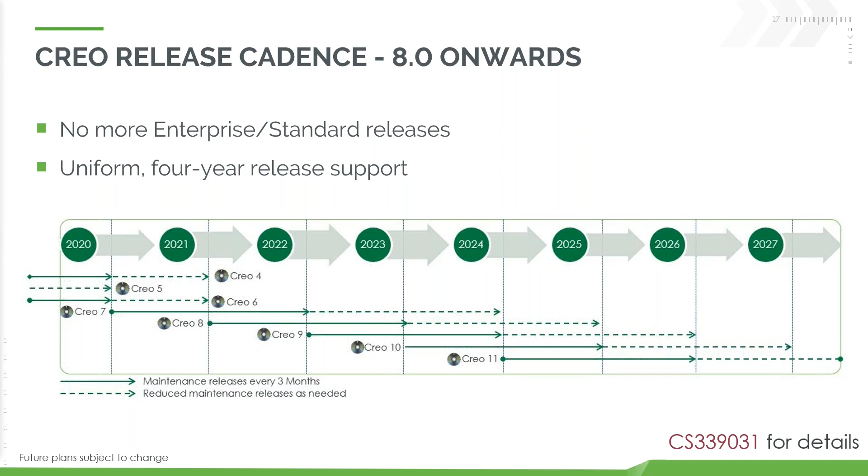So let's talk about some of where we got to. So Creo 7, Creo 8, some of those recent releases and what's been happening with those. So with every release of Creo, there's always these high-level themes. One of the core ones being just the general productivity enhancements, as well as some other topics you can see here. So with Creo 7, when that got launched, there were a few things there around generative, Ansys-powered simulation, multi-body, additive and subtractive.

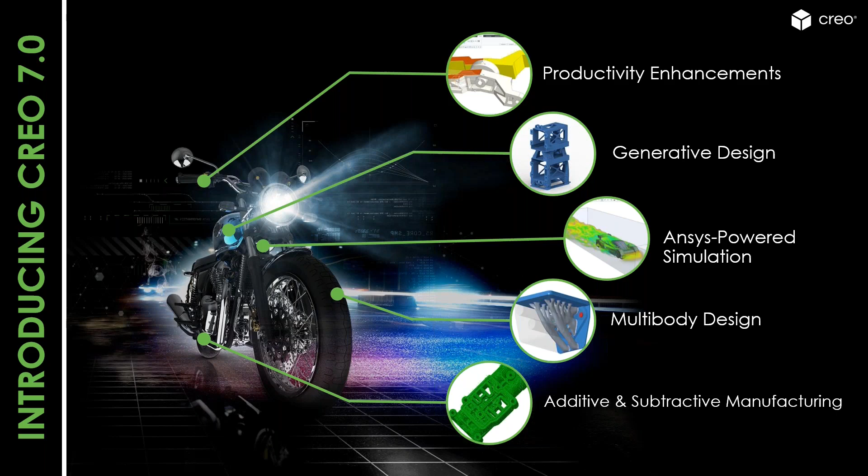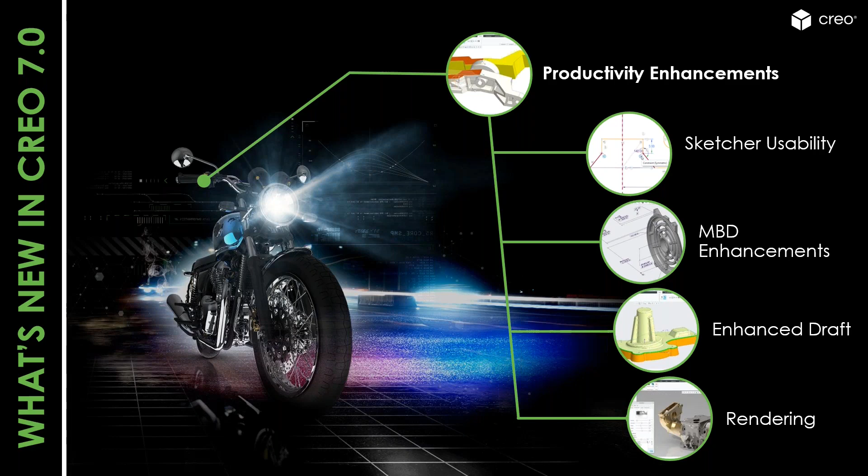So to talk about them in terms of the productivity enhancements, all the usual things, right? There's hundreds of these in every release of Creo. I'm going to get deep into what's there in Creo 9 later on today. But general things around usability, sketching, MBD. There are some very nice new tools in Draft. I had some customers, I remember, who once they saw that, went back to the office and installed Creo 7 that afternoon because they wanted to start using some of that stuff. So tons of general enhancements to make life easier and more efficient.

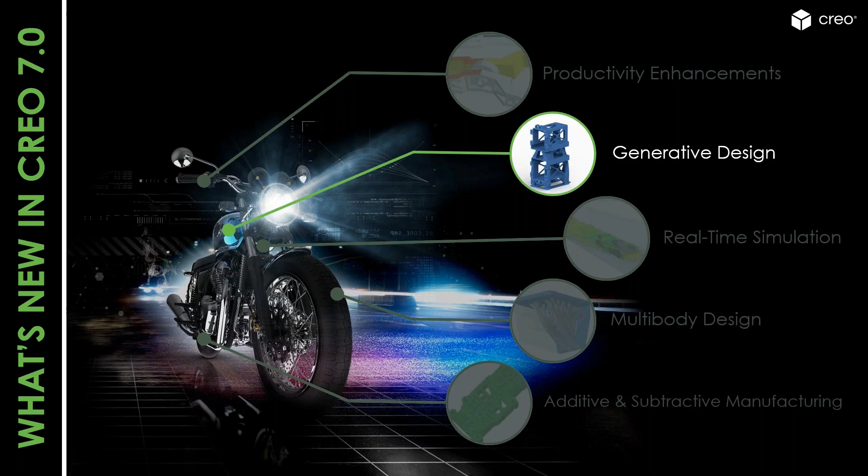But some other bits of technology around the Creo releases. So generative design. For those who aren't familiar with it, generative design is basically the idea of letting the computer come up with a design. So the idea is that you give it some conditions, so some geometry.

So you might say these are bits of geometry that must be fixed. You can see down here, my little screenshot here. So these blue bits, I must have them because I've got an interface there. This box around here is the area where you can do whatever you like. I'll give you some materials, I might give you some manufacturing processes, some loads and constraints and other things, and then go off and solve that for me.

Okay, and so you feed it to the computer, it grinds away and comes up with some weird and wonderful shape that you'd never come up with yourself in a million years, right? To minimize weight, get a better product. So that's becoming more and more common.

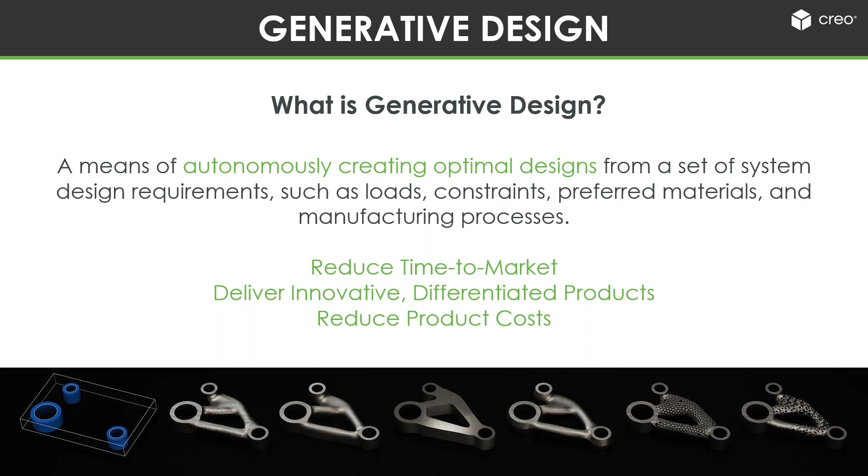And so I guess in Creo 5 PTC actually introduced some generative technology. It was through a third party. Actually, it's a solution that Leap sells, one of their products. So PTC partnered with those guys. But in the interim period, they acquired some technology, a company called Frustum. So in Creo 7, that Frustum engine was launched inside Creo.

Okay, so there are two flavors of that. Initially, when it first launched, there was the Generative Topology Optimization extension. Try saying that 5 times really quick. So GTO. So this was basically to run on your desktop to feed it all of those things I just talked about. Okay, so give it some starting geometry, preserve geometry, manufacturing conditions.

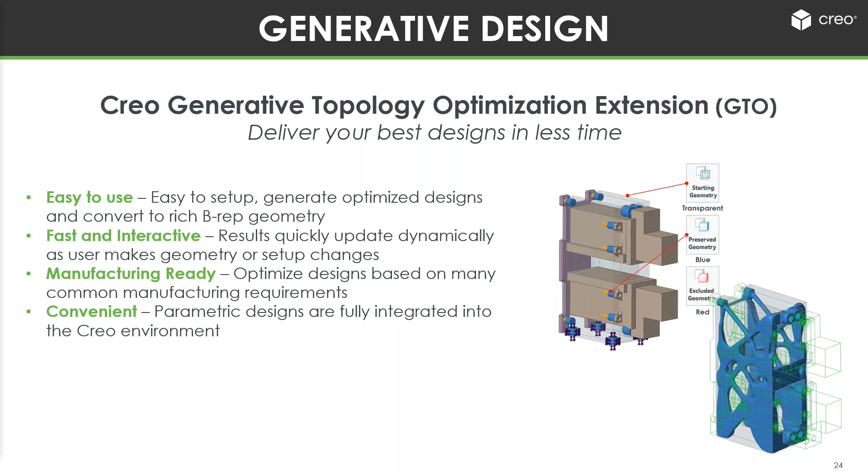The beauty of this, it was completely embedded inside Creo, right? You're not farming out to some other system. It runs all inside the native environment. The other big thing is it also automatically builds for you a manufacturable surface. So a lot of things where you take that externally, you end up with a faceted model that you then have to somehow bring back into your CAD tool and make into smooth NURBS surfaces, manufacturable surfaces, whereas Creo does that itself.

Okay, so this launched with Creo 7 at first release, and then a little bit down the track with a couple of maintenance builds, PTC launched the cloud-based Creo Generative Design extension, so GDX. So the idea of this is, when you're looking at a design problem like this, you might have lots and lots of options that you want to look at, right? So you might be looking at multiple materials, multiple manufacturing constraints. Maybe you're looking at, well, what if I 3D print this versus cast it or machine it, whatever else it might be. So they have different constraints to them.

Different loading conditions as well, but you've got lots and lots of different options, and you want to look at those different combinations. Okay, so that's where the cloud comes in, because with cloud we've got lots of compute power. You can scale that up and feed it loads and loads of stuff rather than having to just send them one at a time, running them on our desktop.

So the idea of this is we can set up all of those different conditions inside Creo, upload that to the solvers on the cloud, which will then go away and solve all the possible combinations. And then we've got a bunch of tools to look at, analyze that, compare and contrast, select which one we think is the best, and then feed that back into our Creo model to give us some full B-rep geometry. Okay, so this is the cloud-based GDX.

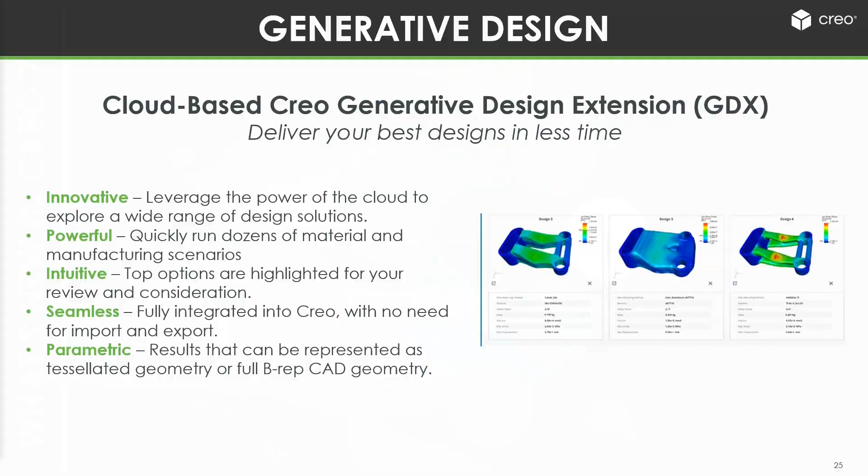So some other parts, ANSYS powered simulation. So again, back in some early versions of Creo, it was Creo 6, was when PTC started partnering with ANSYS to bring in some of the ANSYS technologies. So that was with Creo Simulation Live, which first came in there, which is based on Discovery Live. So this was real-time simulation. With Creo 7, PTC also started to bring in some of the other ANSYS technology as well.

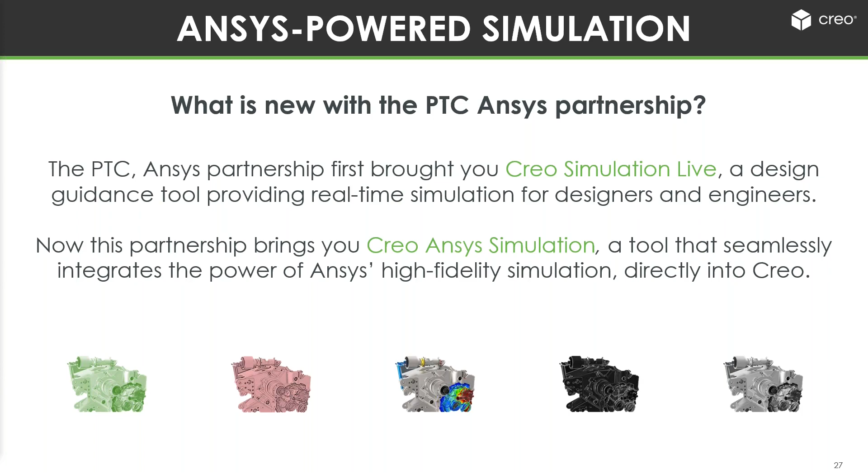Okay, so Creo Sim Live, as I mentioned, this was first introduced in early builds of Creo. So this was the Discovery Live. So this is basically a GPU-based solver. So that means it's hardware dependent. You need to have an NVIDIA graphics card in your computer that it utilizes to essentially solve almost instantaneously. Okay, so that was first introduced with structural, thermal, and modal simulations.

With the release of Creo 7, fluid flow capabilities came in as well from Discovery. So that could be internal or external flow. In a similar vein, you set up your model and let it grind away and start showing your results almost instantaneously.

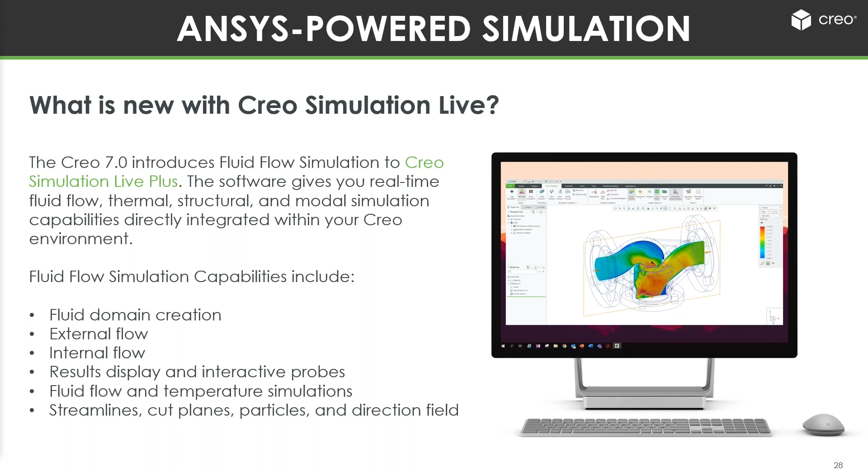Okay. So the other part was Creo ANSYS Simulation. So this is basically the ANSYS Workbench engine. So that's the meshing and solving tool. So again, that's being migrated into Creo. Creo 7 was the first release of that. You'll see in later slides how that's been evolving with releases. So this is basically ANSYS running embedded inside Creo and all of the capabilities that can bring.

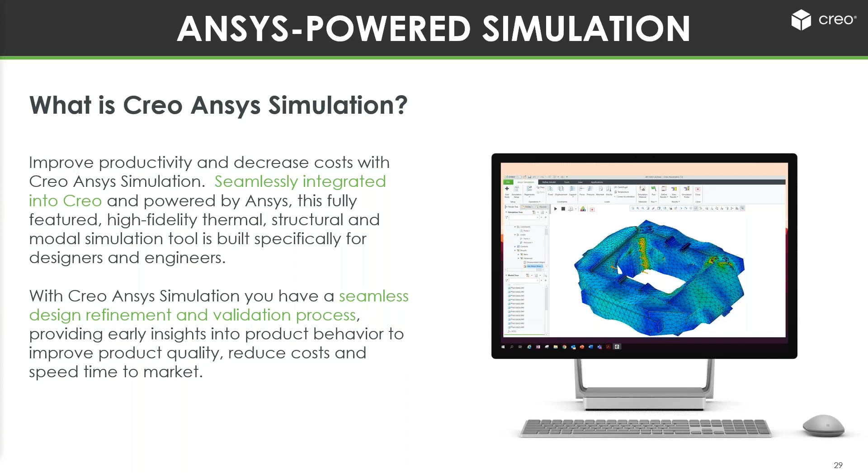Next one at a high level topic was multi-body design. Okay, and this was really the big one. So Creo 7 introduced multi-body design as a set of design tools. It lets you basically define different geometric volumes as individual bodies. You can assign different materials to them. As an example, you can use them for different scenarios.

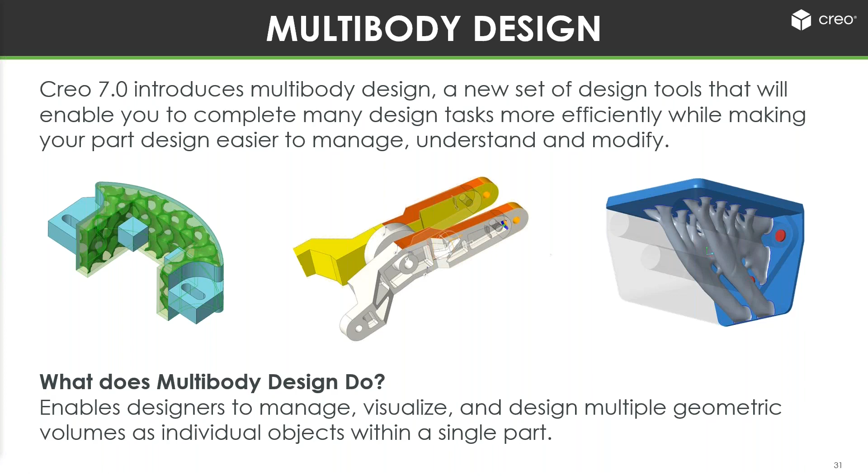So really, PTC is quite famous for not having multi-body in Creo. It was introduced really to enable these different workflows for some of these new technologies. So for example, additive manufacturing, the ability to define certain parts of the model to use lattices versus solids, or maybe different materials. In generative design, again, we have used different bodies for defining these different regions that we want to keep or exclude, or let the system muck around inside. So it's really basically giving you a different set of design tools to enable faster, easier, more flexible modeling.

So speed, there are certain tasks that can be easier modeled as solids. So multi-body gives you a way to do that. Probably one of the most common ones would be around clarity here. So, multi-material parts, the classic silicon injection molding, over molding, right? Where you've got one part with multiple materials inside that. So we can do that as multiple bodies. And just general flexibility. It could be around different pieces that might require different approaches. Simulation-driven design. So, in our example here, the important bit is the fluid domain. So we can model that up and create that as a body and use that to build our geometry.

So multi-body was first introduced in Creo 7. This was a very big change, right? Probably the biggest change since the introduction of Creo, because it was really changing the way that the engine could behave. Now, if you don't use multi-body, that's fine. You can keep using Creo as you've always used it, all the way back to Pro Engineer days. It still behaves in that same way, but bodies are now an option there as well.

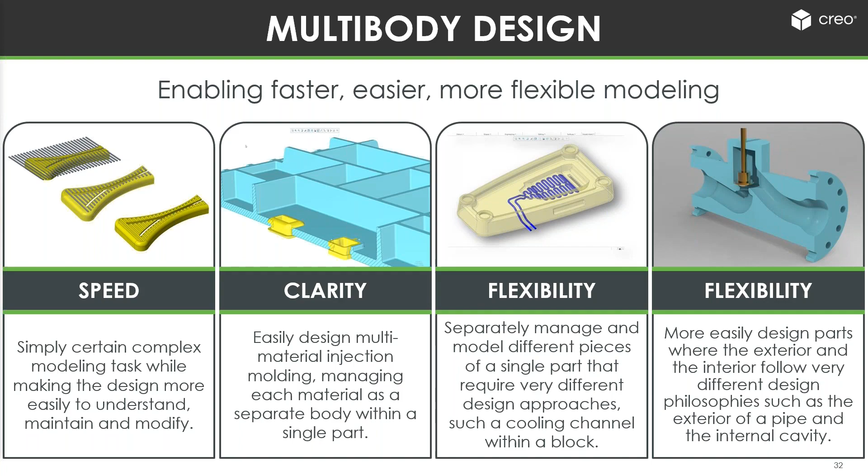And the last topic was really around additive and subtractive manufacturing. So again, back in Creo 3 was when PTC first introduced some of the additive tools inside Creo. So basically the ability to send your files directly to certain supported 3D printers. Creo 4 was, I guess, the big step there, where they introduced the lattice feature. So the ability to define these repeating structures inside your CAD model, rather than taking that outside to some external software.

Now that's fine if you're talking about prototype printing, but if you're getting into actual additive manufacturing, it's important to understand, well, if I make this as a lattice, what's that going to affect on the structural integrity of my model? So you define that lattice inside the CAD tool, perform your analysis, understand what's going on; that was very important. And that's really why PTC introduced the lattice feature back in Creo 4.

So in Creo 7, some more enhancements to that. Things around the ability to have user-defined lattices, so you can define your own part and use that as a lattice. We had a lot of queries from the universities who did a lot of research in this area, coming up with new optimal shapes. Some formula-driven lattices, like the gyroid and other shapes built off research coming out for self-supporting lattices. Stochastic lattices, these more organic shaped things that can follow geometry, often used in medical implants where you want tissue or bone to infuse with the implant.

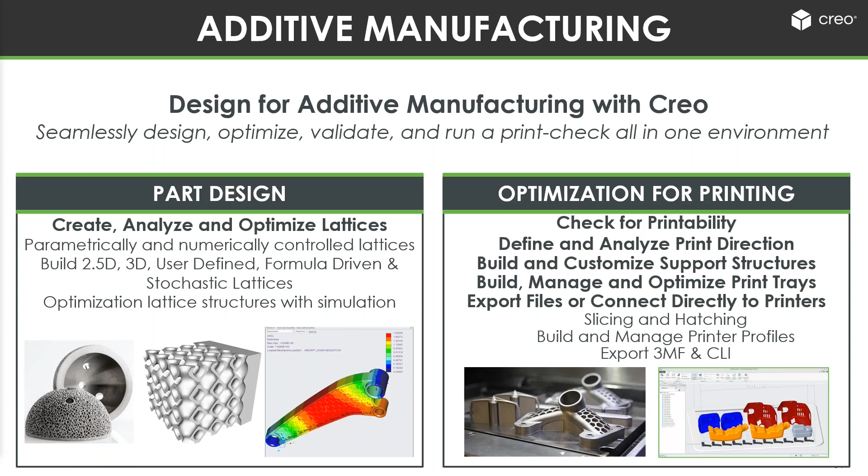And some tools around optimization as well inside simulation. And then also some options around printing. So lots of printability checks and analysis for print direction around support structures. Particularly important when you get into metal printing, where you want to minimize support structures because you usually have to post-machine that off. Also, added support for 3MF files, basically the new file format that's replaced the old STL format because it supports multi-material, multi-colors, and CLI files for metal printers for slicing. So that was some of what was there inside Creo 7.

And then we move on to Creo 8, which came out April of last year. So again, the high-level themes there: usability and productivity, the general one; model-based definition and detailing; generative design and simulation; additive subtractive manufacturing. So a lot of common themes there. PTC has been spending a lot of time and effort in bringing these emerging technologies embedded inside Creo. These technologies are obviously rapidly evolving, and with each release of Creo, we're seeing more and more of those capabilities coming in.

So on the general usability productivity side, again, a whole ton of things. Some of the high level ones to discuss, the nice change to the dashboard layout. So a bit more text inside the dashboard. Probably gone a little bit too far down the icon path, but adding a bit more text in, particularly good for new users.

So a little bit more explanation of what you're looking at there. The ability to control the layout of the dashboard with locking these panels into the graphics area, having them automatically appear whenever you start that feature. So if you're using them over and over again, they're always there, expanded out, ready for you to access a lot more quickly. The updating datum display, making them shaded and coordinate system with colors and things like that, so you can see them more easily.

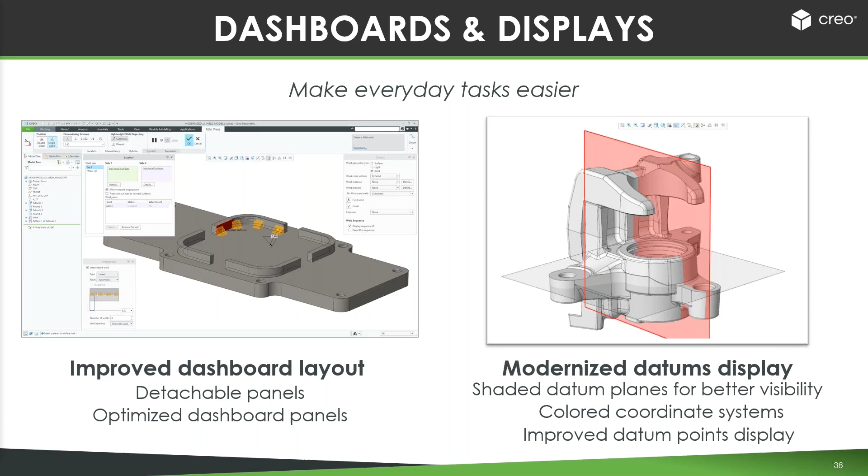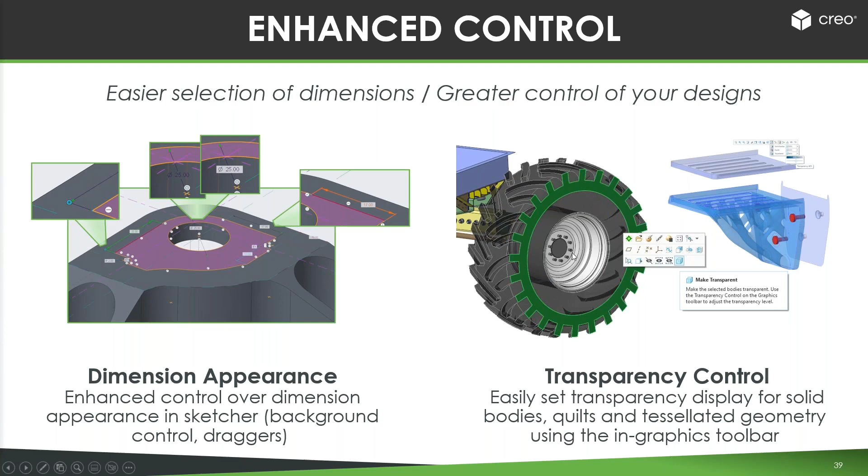Other general things like dimension appearances, little things like putting the shaded background on the dimension so you can see it easily on the screen depending on the color scheme. Transparency control, so when you're working with multiple types of geometry, the ability to easily sort of fade out solid geometry to easily see tessellated geometry and the like.

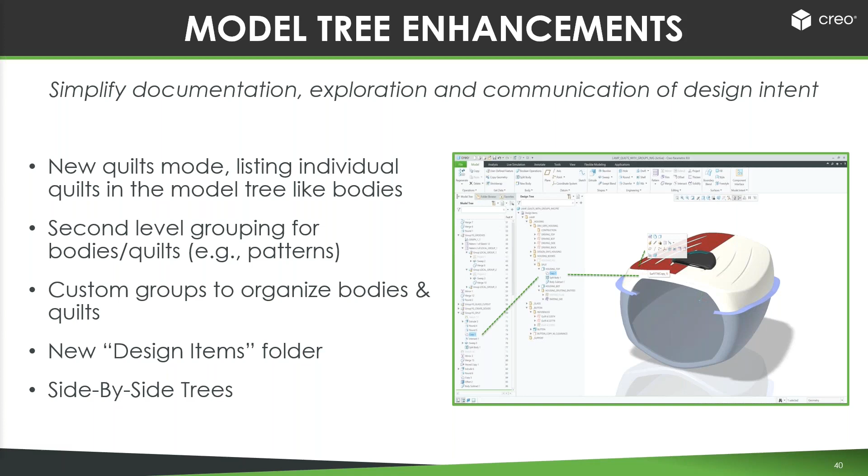A big one was the model tree enhancements. Okay, so this was quite a big change, and it's been expanded in Creo 9, which I'll talk about in a little bit. But some options around some new quilts mode, so you can actually see quilts inside the model tree, kind of like you see with bodies. So this new ability to group things, the new design items folder, and the new design tree where you can show that. So it's a way of, again, sort of creating grouping of your features that's not dependent on feature order or history, but a logical way for you to stitch things together to help you understand how your model's being built.

Also included in that was this new snapshot for quilts or bodies. So this is a really nice tool. Basically, I can pick on a quilt or a body inside my design tree, and I could show a snapshot of that. So I could say, what did this quilt or surface look like when it was first created before it got merged and stitched together? So it will allow me to see the completed model as well as the surfaces used to build it, how it was when it first got created.

Okay, I know it's a really common thing, particularly people doing surface design or working with a model that's been built that way. You'll roll through the model tree or use the model player to show how it's built. You can see those surfaces. The nice thing about this is you can see those surfaces, what they look like before they got consumed, while still looking at the finished product as well. Okay, so it's a nice way to visualize that information. So that was introduced back in Creo 8.

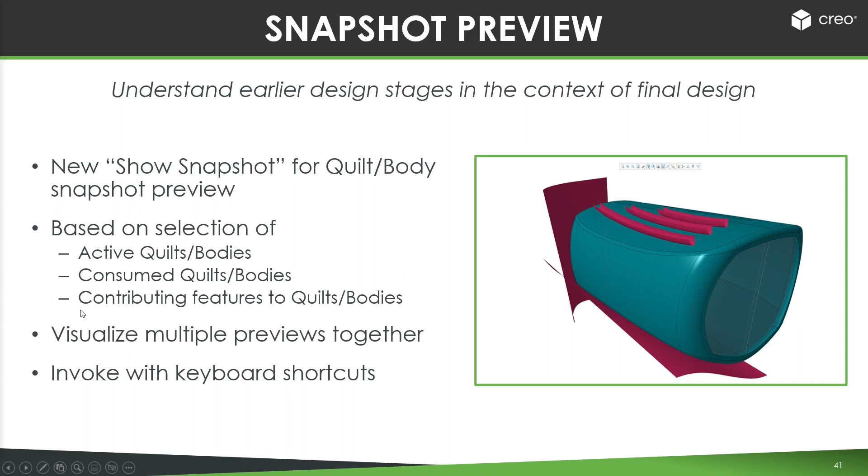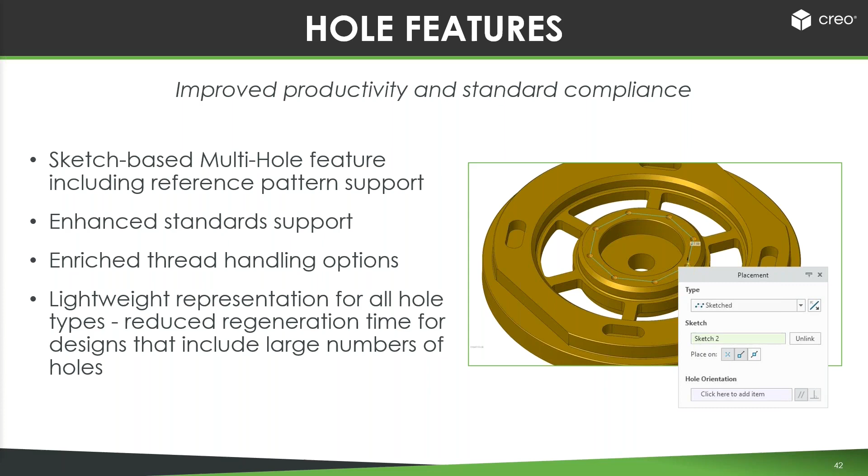Some hole feature enhancements. Okay. Plenty of things to do with holes. Sketch multi-hole, so the ability to define a sketch in one for your hole and then have it put holes on all the points inside that. Some updates to the standards, some new thread handling options in terms of when you're drilling through. The lightweight representation for all hole types, so that's the ability to represent that hole rather than as actual geometry, just to show a curve or a sketch that represents a circle. So if you've got thousands and thousands of holes in a model, that can definitely help speed up performance. But that was introduced, the ability to actually do that for all types of hole.

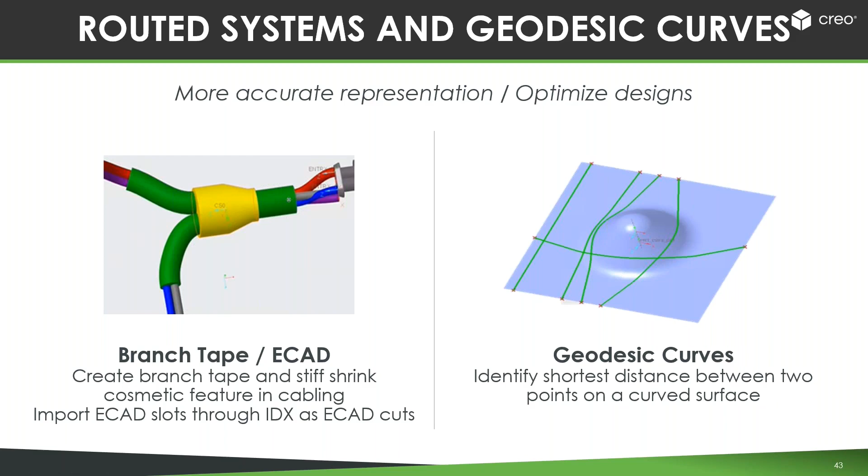Routed systems design, so some other things there like with the cabling, so new branch tape and stiff shrink features around your cables, so representing heat shrink and stuff. A little bit of stuff on the ECAD side for slots through IDX format when you're exchanging that with ECAD systems. The geodesic curve was introduced in Creo 8. So that's the ability to identify the shortest distance between 2 points across a surface. Okay, so it can be quite useful when you're working with things like maybe carbon fiber or composite manufacturing, things like that, or design, working at those shortest paths.

Inseparable assemblies. Okay, so this was a nice new one. So the idea of this is you can apply this for the Creo models. Probably where we see most customers using it is when you're dealing with imported data. So you might get a STEP file in for a motor, for example. Right, so you'll import that STEP file, and you'll get the motor and a whole structure of bits underneath it. There might be 20, 30, could be 100, maybe even more sub-assemblies and parts inside that, right?

But you don't want to deal with all of that stuff, okay? Because all you care about is the actual motor itself, right? So we could bring that model in. It'll create an assembly file for it, but then we can go and make all of the components, make it an inseparable assembly. So essentially it embeds all of those components inside the assembly.

Okay, so you get this little icon that shows that. So the idea is that if you're working with directory data management from a file level, you'll just see .asm file, and that's it. Okay, it'll be a big assembly file because it contains the geometry of all the parts. Okay, but it's just one assembly file you have to work with.

Now, all those parts are still separate items, right? You can still pick on them. They'll even support mechanisms and stuff like that. But you've only got one file you've got to deal with. And from the Windchill customer's perspective, then you've only got the one assembly file, which means you only get the one WT part as well for the assembly. So you don't have all these other bits and pieces you've got to worry about and manage.

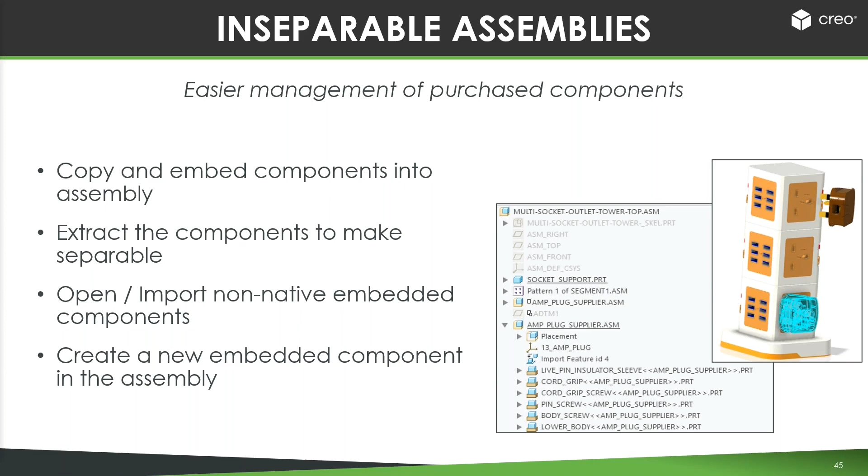Okay. So this was introduced in Creo. It's a really nice tool there when you're dealing with sort of third-party data that you want to reference or use. Okay. Render Studio. So Creo's been using Keyshot as the rendering engine in the embedded renderer for a while now. So with Creo 8, that engine was updated to use Keyshot 9.3. So the big thing with Keyshot 9.3 engine was that it also could use your GPU.

Up until that point, Keyshot had only been a CPU-based renderer and used the cores in your processor, and it was very scalable. It was great for that because you didn't need to have a special graphics card or anything like that. But you know, a lot of us have those graphics cards anyway for other stuff. So with Keyshot 9.3, it could also use the GPU as well if it detected a compatible card.

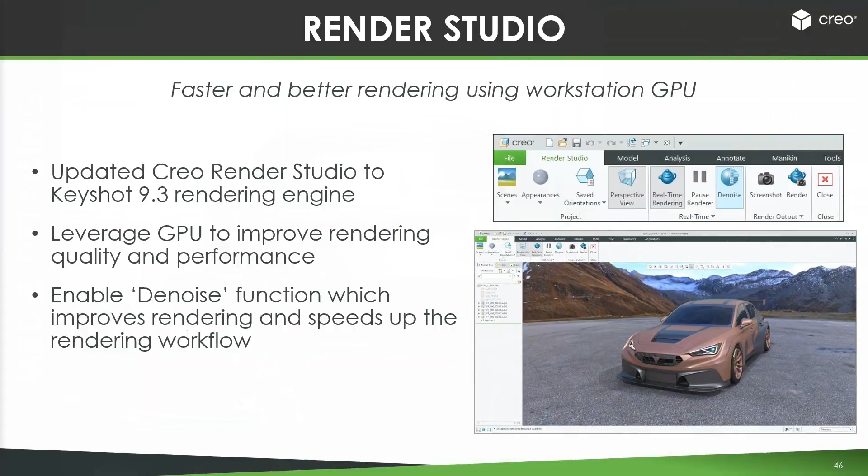So again, that had to be an NVIDIA card with the supported CUDA RTX cores inside that. So it enabled a couple of extra things like the denoise feature, which was only GPU based. Okay. So that's some of the core stuff. On the MBD and detailing side of things, again, loads of enhancements inside this. So symbol modernization. Okay, so got a nice little overhaul there.

So basically, in terms of placing and working with symbols, they're using the ribbon. So getting rid of the old dialog boxes and things like that. A new customizable symbol gallery you can use and pick from. A lot of stuff done on semantics across multiple areas. I'm going to talk about semantics a lot.

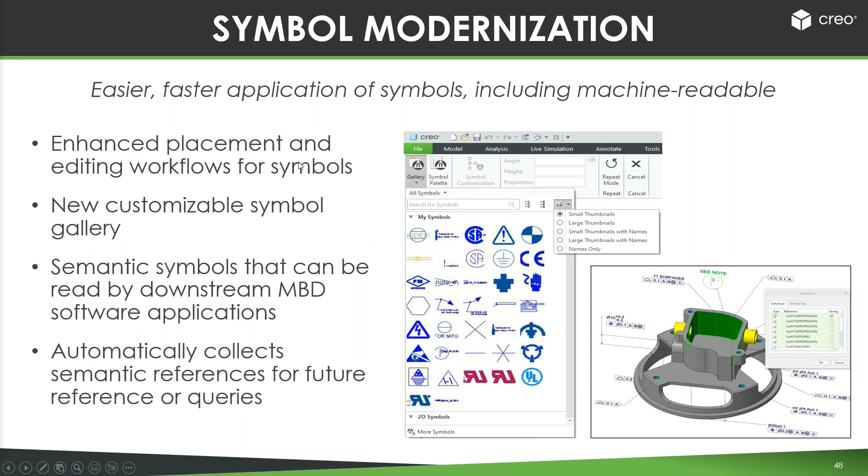For those of you who aren't familiar with that term, the idea is that you can see this note here that points to a surface, and the semantic references are basically all of the geometric references that particular annotation describes. So that becomes very important when you want to put that note on. You don't want to just apply it to that one little surface patch there. You want to pick all of the surfaces that it is relevant to, okay? Because that can also be seen in downstream applications as well. So there's been a lot of work done through symbols. You'll see some of the other slides later on around collecting all those semantic references.

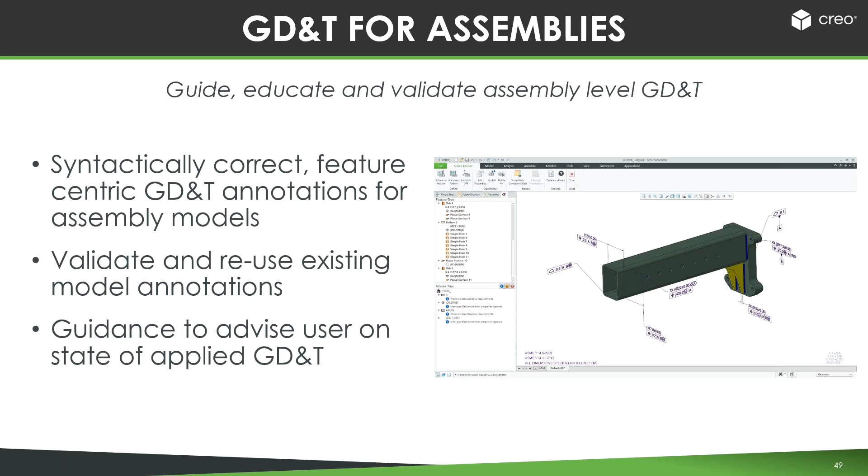GD&T for assemblies, so the geometric dimensioning and tolerancing. So basically the ability to now apply that when you're working in assembly mode as well. So this is in the GD&T Advisor tool that's available. When you're working with annotations, if you're doing a lot of this stuff in 3D, you have these different views set up to manage those. So basically some better tools for managing and working with those annotations inside that, okay?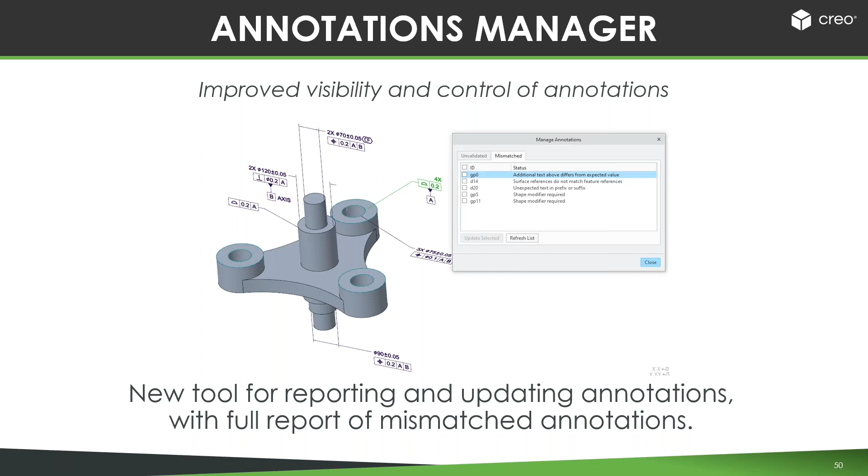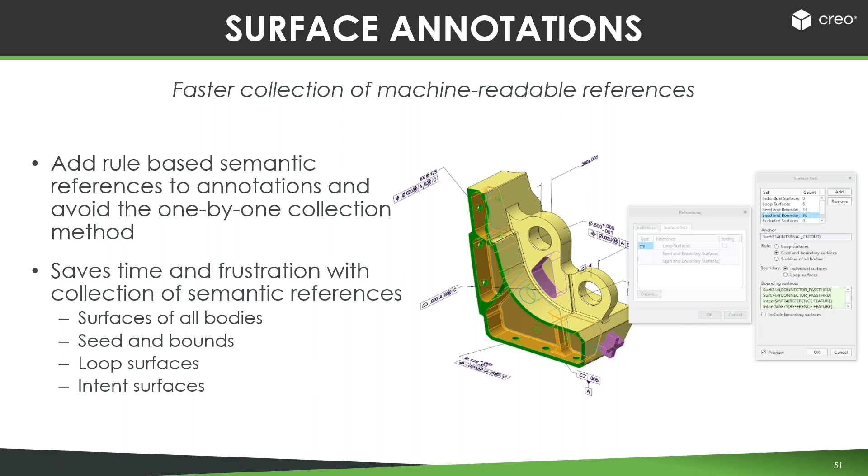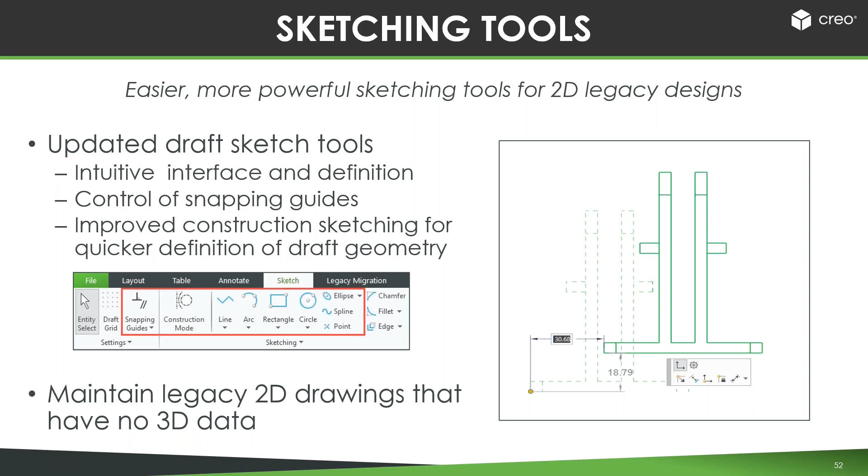Sketching tools, so those of you who love doing drafting inside Creo, drawing lines in 2D, they did a bunch of enhancements there to add in more sketch-like tools inside there. So lots of snapping and moving and things like that. If you need to deal with any old DXF imported geometry or things like that, it's so much nicer to deal with that in Creo 8 for sure.

So on the generative design side of things, this sort of simulation-driven design where the computer works it out for you. So the local one, the GTO, the ability to run multiple design studies concurrently. When it was first introduced, you could only run them one at a time. So now you can run multiples if you've got enough resources there to work with that on your machine.

Another ability is to automatically create the starting geometry, right? So I would define my geometry that I have to have, and then I can just say automatically generate a bounding shape around all of that, and then you can play inside that geometry, okay? So just with one click, you don't have to model anything yourself.

A better reconstruction process. So I was saying before how when you generate these things, you end up with a faceted model, but then Creo will automatically build a smooth surface feature for that using the freestyle tool, which was introduced all the way back in Creo 1. So essentially some tweaks to that in terms of how it handles that reconstruction process, the ability to bring in, like if you bring in parting lines, to handle that a little bit better. Also a new constraint around crease radius, so handling things around getting web geometry and things like that.

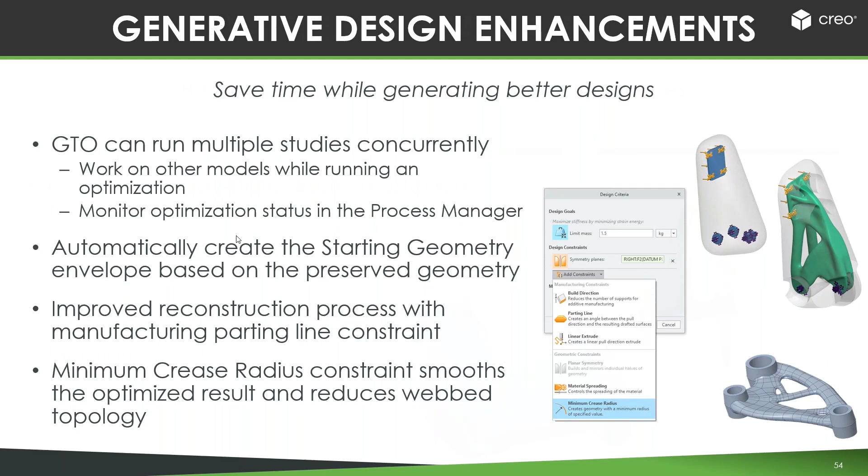For Creo Sim Live, Fluids was introduced in Creo 7. In Creo 8, Fluids was updated to also include steady state results, whereas in Creo 7 it was only transient. There's also some other flexibility around working with probes, looking at results in different areas, basically making that a little bit easier to work with.

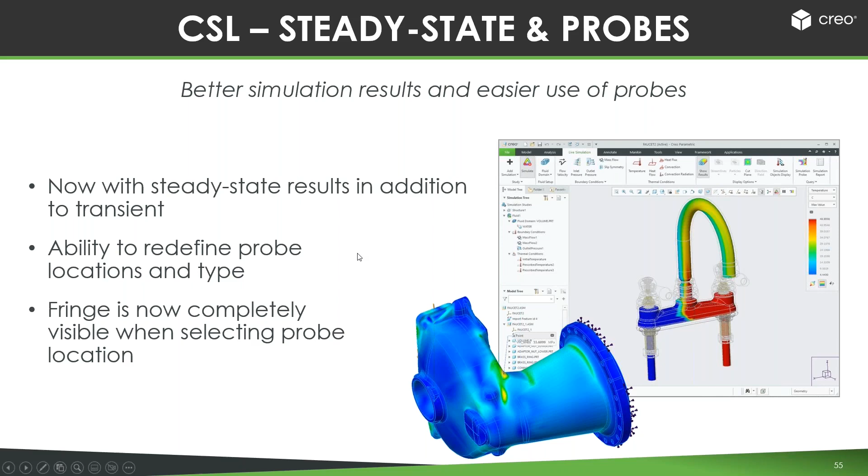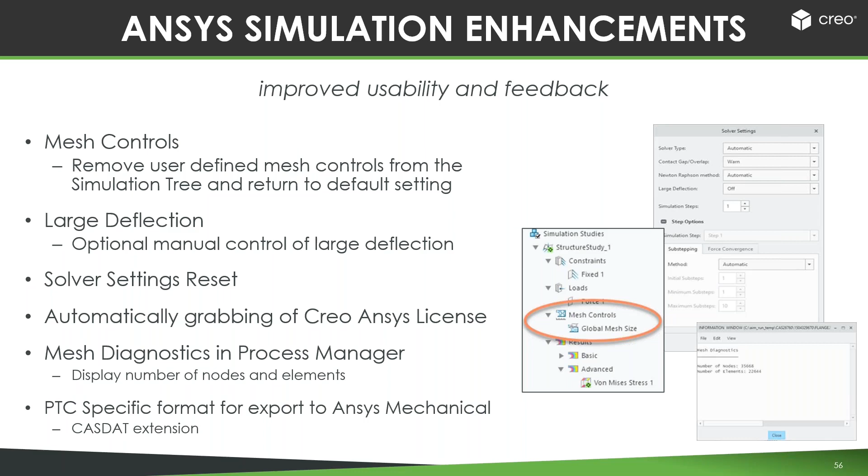On the Creo Ansys Simulation side, as I said, it was first introduced in 7, and this is not a one-click thing, not all of Ansys is there inside Creo. Obviously there's a lot of things to migrate across, so they've been continuing to expand that out. In Creo 8, adding in some more mesh controls, working with large deflection, some diagnostics and things like that as well, basically increasing capabilities of that inside Creo.

And then the other high-level topic was again around additive and subtractive manufacturing.

On the additive side, one of the big things was simulation-driven lattices. The whole point of the lattice feature is so that you can decide if I'm going to print this, if I'm actually going to make it this way, I can run a simulation to see if the lattice is going to be strong enough. But we might have a scenario where we want to hollow something out with a lattice to save weight, because maybe it's going up into space or something like that, right? But we're going to want to make sure it's going to be okay.

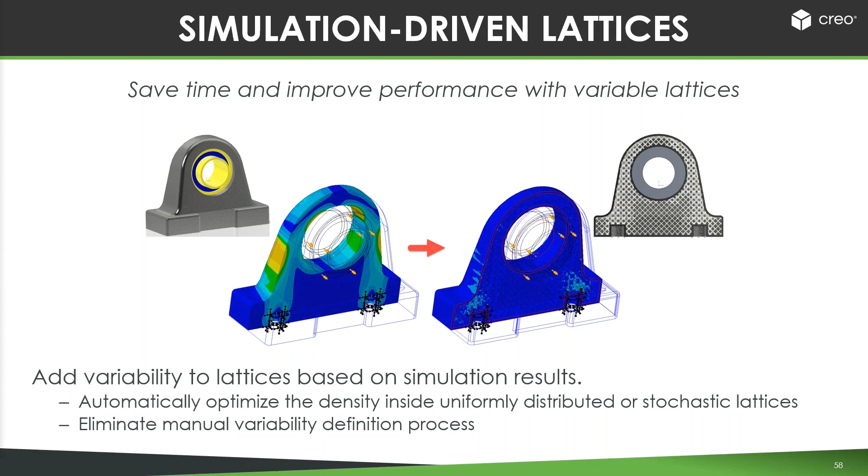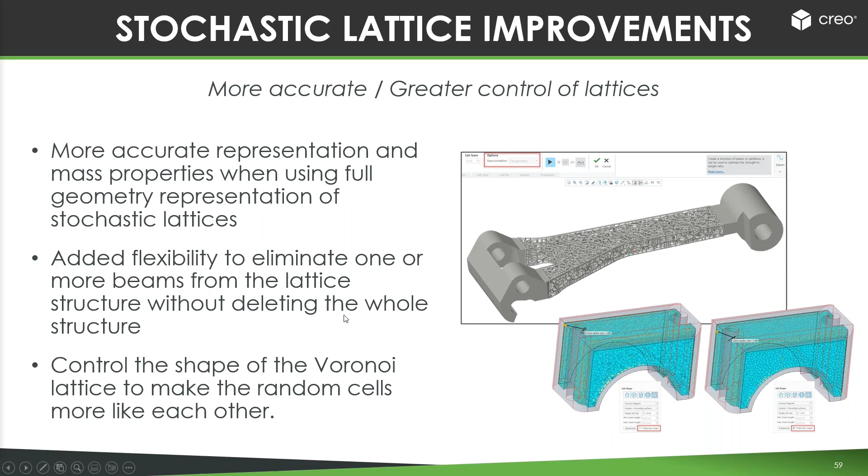The stochastic lattices that were introduced back in Creo 7 got some updates around things like closer following of edges, some tools around when you actually generate that. If you generate it as solid geometry, there's a lot of bits of geometry that can go in there, so there were some improvements in that method of how it works, and in working with some of the options inside it.

There are build enhancements too, more updates in terms of optimizing the build, finding overhang directions and stuff like that. As I said before, this is probably more important when we see customers doing metal printing. If you're doing plastic printing, usually you just want to build it flat to reduce the vertical height to minimize your build time, because it's a lot easier - you print in different materials for your support material, so there's a lot of tools there for breaking that away.

But with metal printing, because you're printing in metal, you often need to post-machine that, so you really want to minimize the amount of machining. So you really want to optimize that angle to minimize support structure requirements.

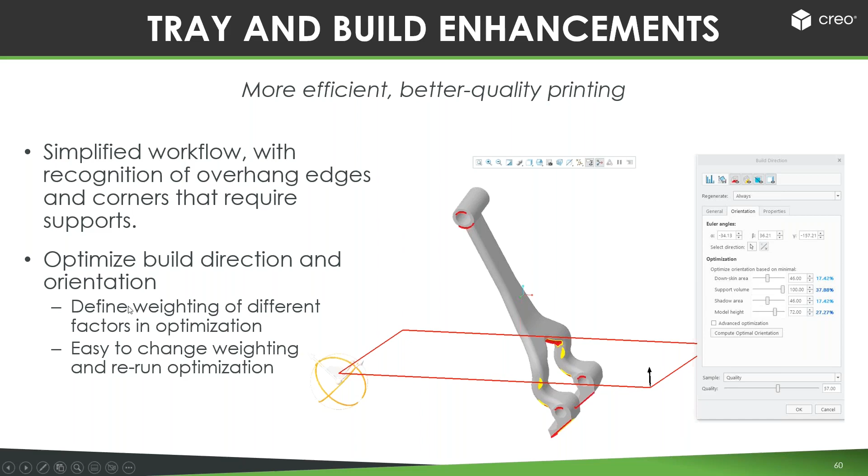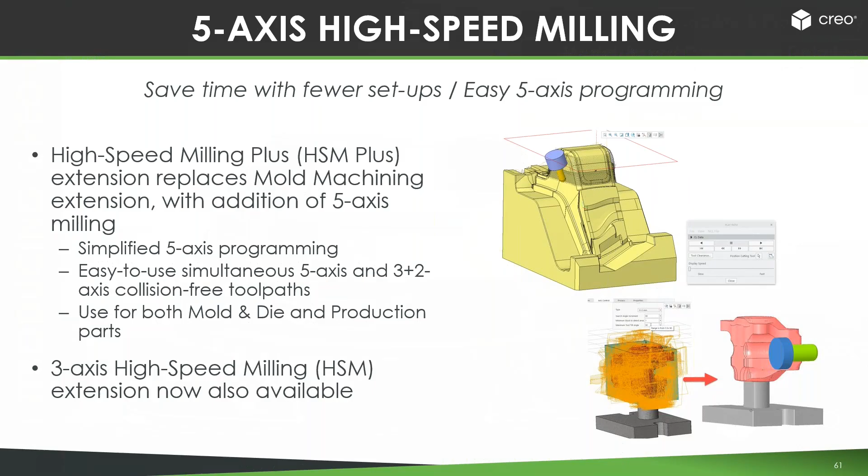On the subtractive manufacturing side, PTC has been working with a third party around bringing some of their technology around machine simulation into Creo, back in Creo 5 I think it was - Taj will correct me on this. There's also some high-speed 3-axis milling introduced back in Creo 5. With Creo 8, there was also high-speed 5-axis milling, a whole bunch of high-speed machining processes around mold machining in particular, so lots of 5-axis stuff in there. All right, so that's some of the stuff that was in Creo 8.